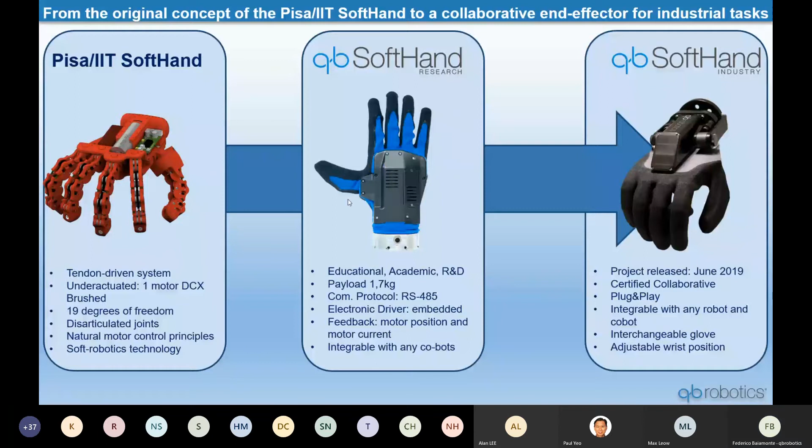So I will give a short overview of our company and especially our product. We are specialized in the realization of anthropomorphic robotic hands, and we are now at the third generation. The first prototype was realized in 2011 and was declined for different usage - research, academic, biomedical as prosthesis - and now the third generation is for industrial applications to be used as end effector for cobots. As reference and use case, we have more than 200 hands now applied and integrated in 20 countries.

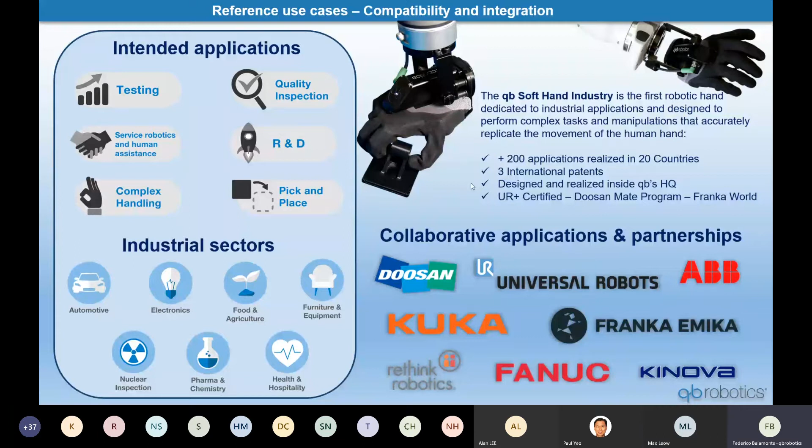The hand is covered by 3 international patents and is totally designed and realized inside our headquarters in Italy. It's mainly used to replicate human hand movement, for example for testing applications, quality inspection, or where you need to directly be in contact with a human operator. As the hand is intrinsically safe and has an anthropomorphic shape, it is compliant and designed according to international certification standards for collaborative robotics - especially ISO TS 15066. This means the hand is intrinsically safe also from a mechanical point of view.

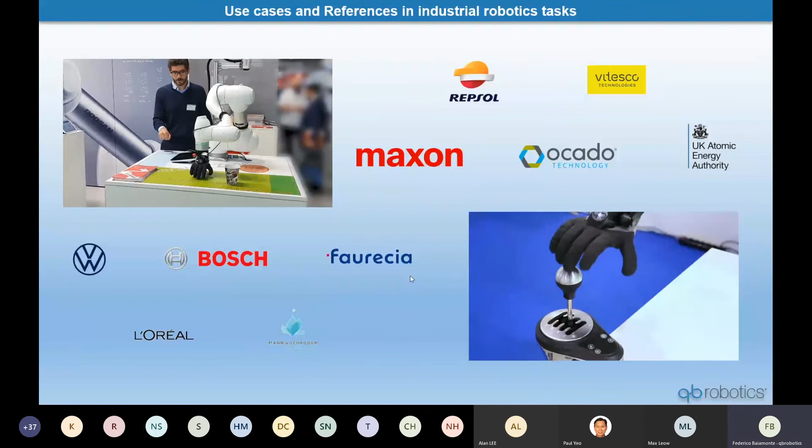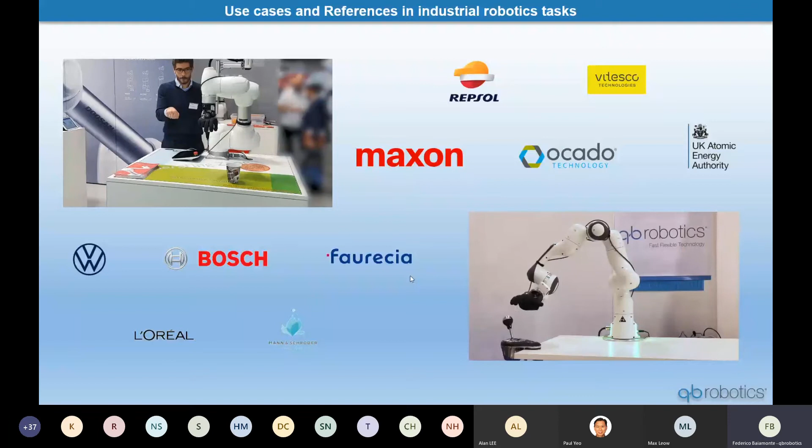I'm presenting briefly 2 kinds of applications we realized during 2 demos. As one of the main requests comes from teleoperation, the hand can be integrated to be used in teleoperation actions, especially for dangerous tasks like nuclear inspection or dangerous object manipulation. It's also mainly used for testing applications and can replicate exactly the human hand movement - the hand can be used to realize such movements.

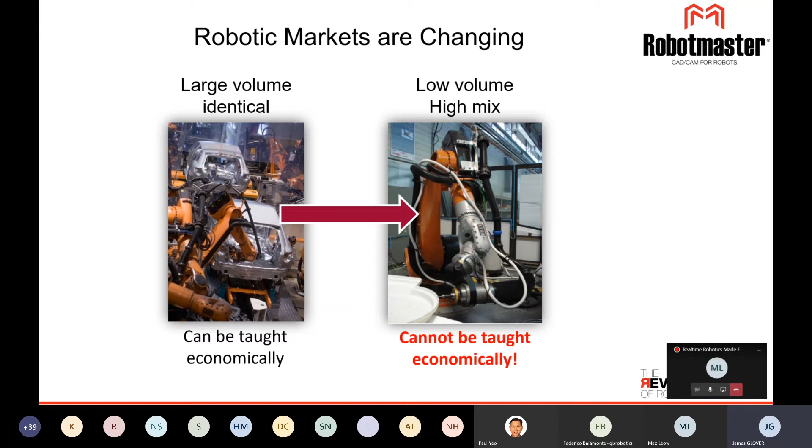So what we've done is we have applied CAD/CAM principles to robot programming. And which can take a long, long time to design and program manually by teaching, we can do in minutes. And we also correct all of the kinematic problems, which is a huge problem.

In pick and place, it's pretty much simple. You can use the control to do it. So the programming costs have to be radically reduced, and Industry 4 is clamoring for, hey, I want to take the part that I have, and I want that program to be the same as it is on a CNC machine, but with the robot.

And if one robot goes down, I want to be able to take that part and put it to another robot, maybe a different make and model, without having to reprogram it. So basically our goal is to make profits on a single item job. That allows us to get into the small, medium companies who want robots but are afraid of the programming cost.

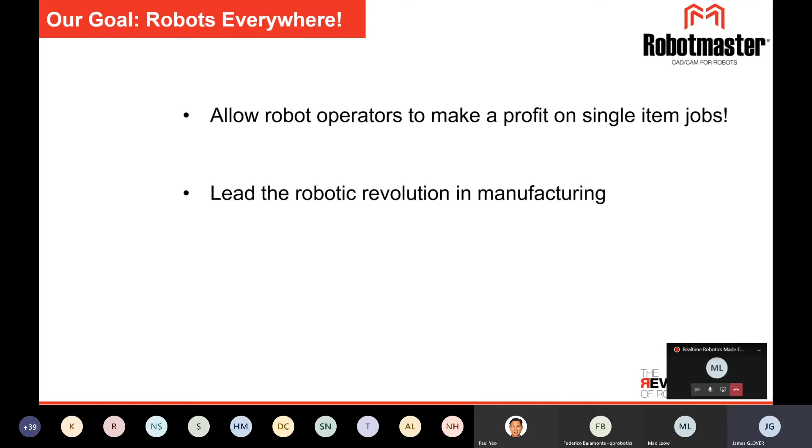We want to lead the robotic revolution in manufacturing, which we pretty much are already, but we want more. And we really want to democratize robots. So a robot in every shop.

In the beginning, CNC machines were very expensive, and you had to have special programmers. You had to shut down the machine and production to reprogram it. Basically, the robots are in the same way. That all changed very radically in the 80s with the advent of PC-based CAD/CAM systems.

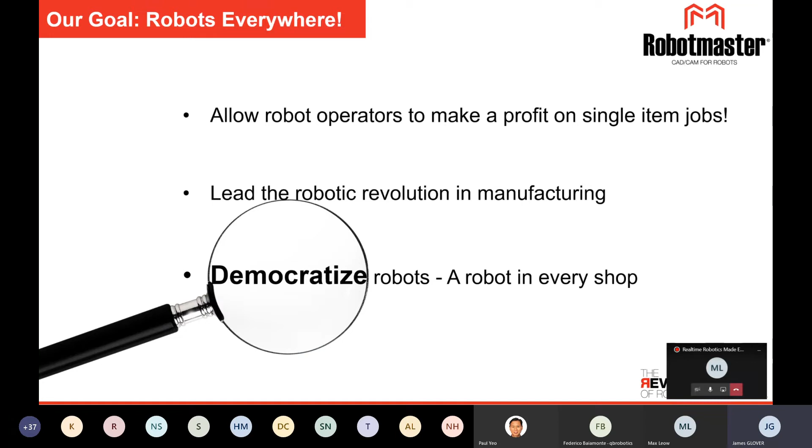We're going to do the same thing for robots. And our goal is to eliminate teaching, because you can't teach complex parts. So we want to make the robot just as easy as a 3 and 5 axis CAD/CAM.

And so you have to be quick to develop the program, fast the kinematic analysis of the robot, do advanced optimization and collision detection, which very few people are. Basically, we're the only ones who do the really high level. A couple people have copied us, thankfully.

And we have to have a quick way of correcting errors so that someone out in the shop floor can do it. And we have to function with all industrial robots. And we're now opening our system to third-party development. So that's our goal in the long term. Most of it's done. We function with everything now.

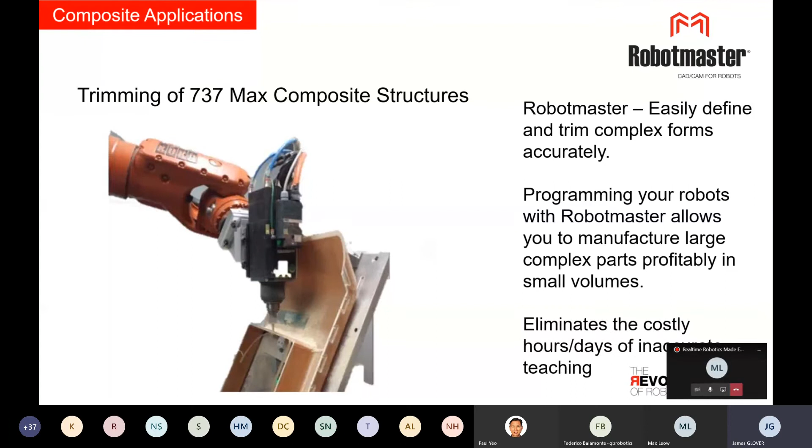And we go all the way from doing a lot of 737 composites, the A350, but that business is kind of shutting down right now. And this got us going. We do a lot of agricultural work also. This would be impossible to do otherwise without a robot.

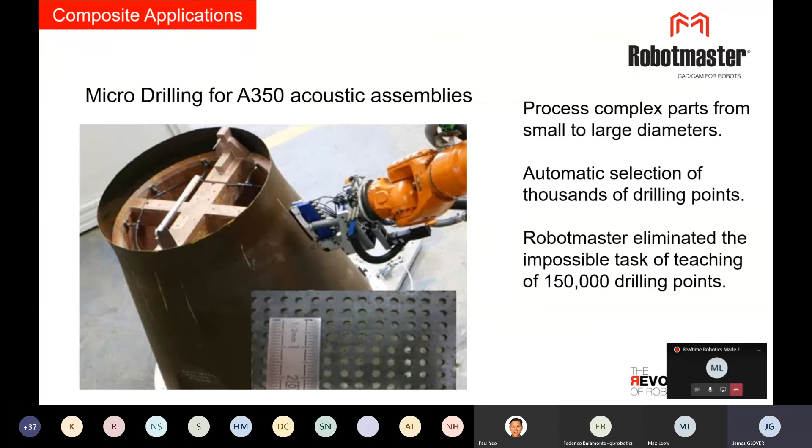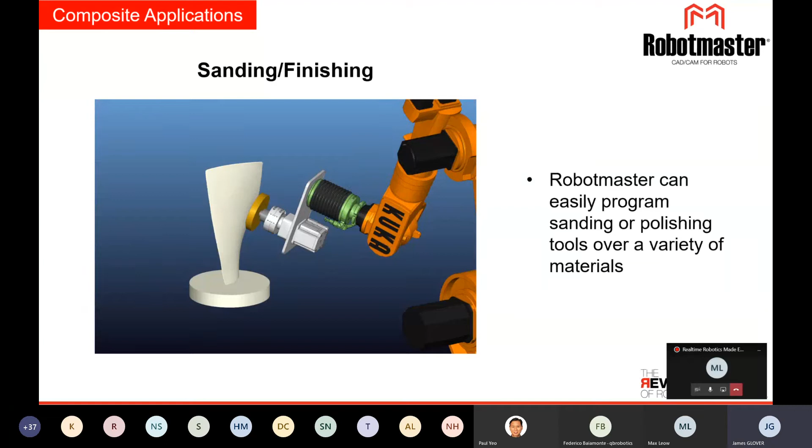We do a lot of work for the LEAP 1C engines, for the drilling cooling points. Do a lot of water jet cutting for complex parts. Sanding and finishing, which is a big demand market right now, and spraying.

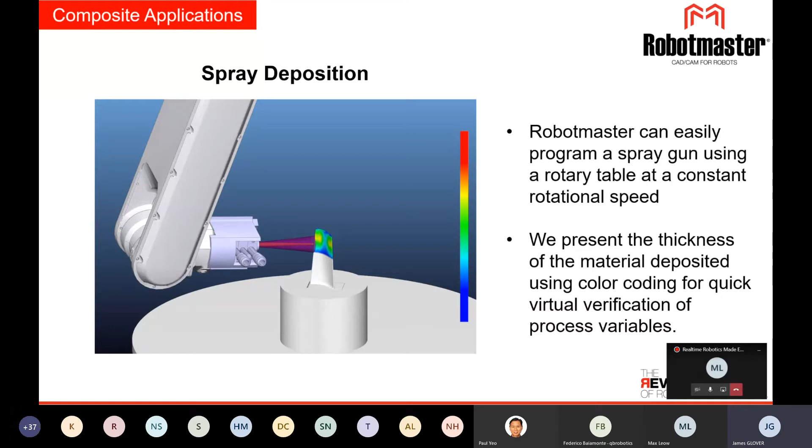So we've developed all of these special programs within Robotmaster to make programming easy and give the people an idea that, hey, I can make money with a single robot and a single job.

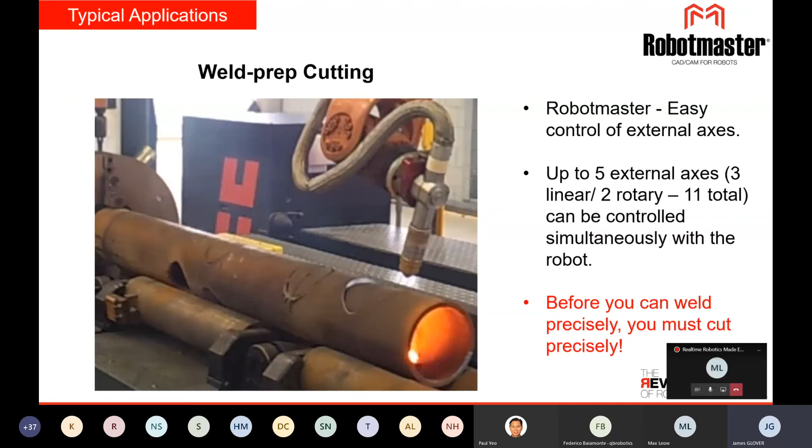And we also do a lot of weld cutting for pre-cut welding for welding, and also a lot of complex and simple welding. In fact, Keppel here in Singapore uses Robotmaster on an ABB gantry system to program all of their ship segments, and they are assembled later on. And we also do the support of the gantry.

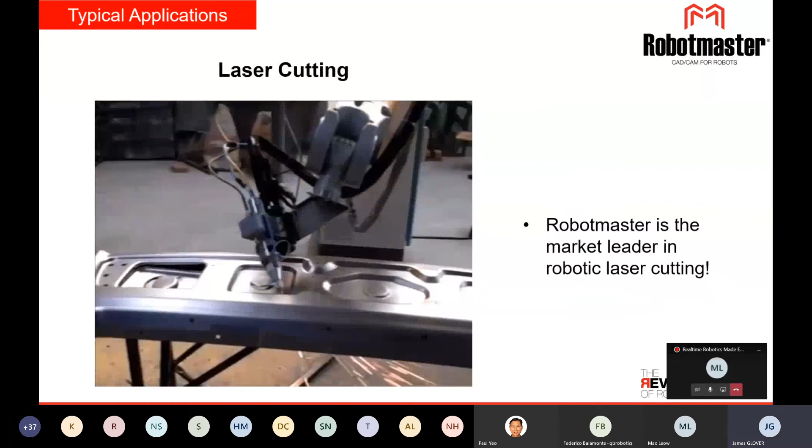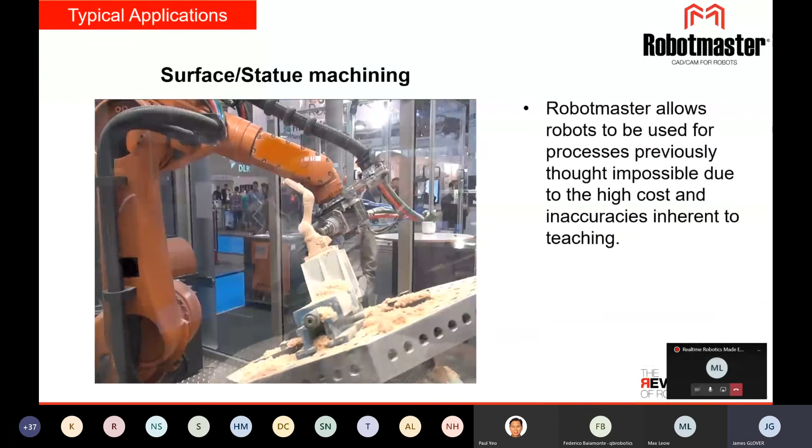Laser cutting. There's multiple things that we can do. And you can go from one robot to another. If you want this little PDF, it's available. We'll post it for you. And basically, we're allowing people to use robots for basically whatever you want, more than just pick and place.

And you can make a single item profitable, which has until now been impossible. You had to make thousands to just pay for the programming, let alone the robot.

So basically, that's what we do. Next week, we'll give you a lot more details on it and show you the process. We'll start an object by cutting it on a laser, then show it with a universal robot depositing the glue, just by changing the robots. So that is basically what we do at Robotmaster - we make you able to make money with robots.

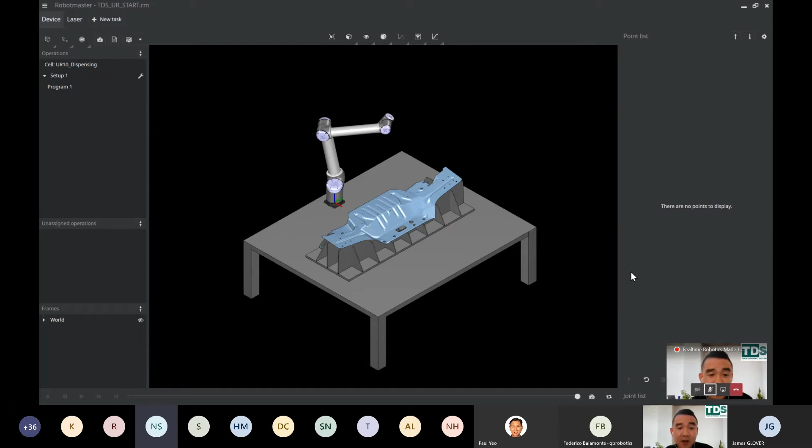I am ready, yes, if you guys are, I'm ready. Yes, you may share your screen now. Okay, can you see it?

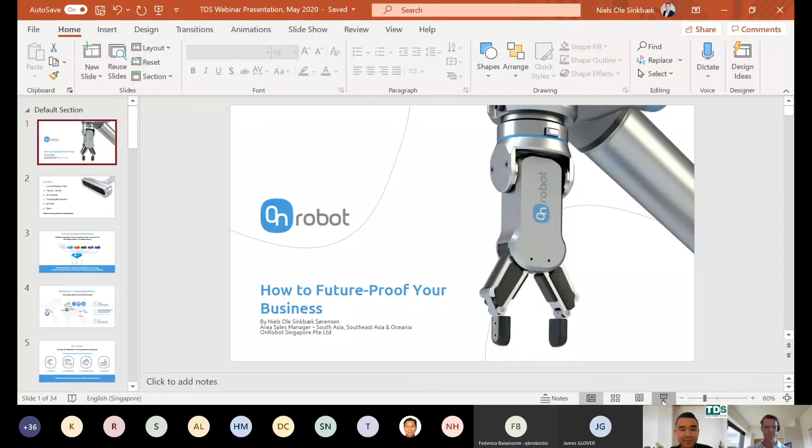Yes, okay. So thank you, Max, and thank you, TDS. My name is Niels, just to make it short, because my name is very long and difficult to pronounce. I'm from Denmark, working for OnRobot, a Danish manufacturer of collaborative end effectors. I'm the area sales manager for South Asia, Southeast Asia, and Oceania.

Give me a second here. Right, so the content - 20 minutes is not a lot of time, so I might have to skip a few slides here and there, but ultimately, if you want my presentation afterwards, I'll share it with you.

I'll talk a little about who OnRobot is and the vision for the company, the new normal, and obviously we're talking about COVID-19 and what that means for automation and businesses. So today I'll cover how do you future-proof your business, a little about our products, something about what we call a one system solution, a quick summary, and then the Q&A at the end of the session - I'll wait on that until Max goes on at the end.

So who is OnRobot? We are a Danish company, but basically a merger of 3 companies from Denmark, Hungary, and the US respectively. We are located in a city called Odense in Denmark, the same city as Universal Robots, by the way. We are around 180 employees globally now - I was staff number 13, and that was 2.5 years ago, so we are growing very fast.

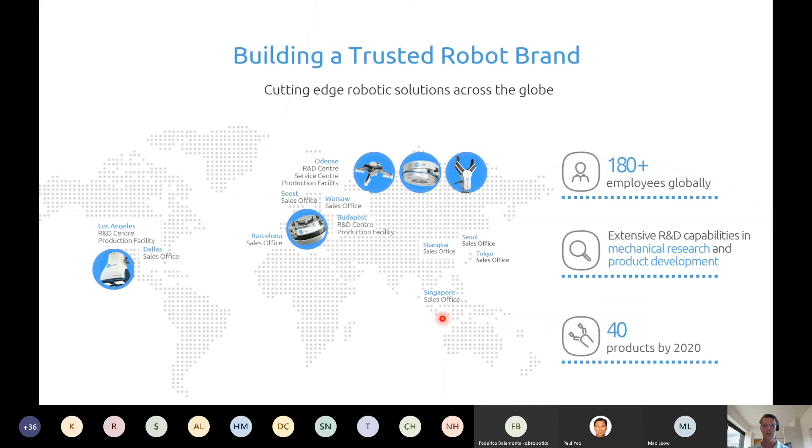In terms of APAC, I'm sitting here in Singapore, which is our APAC HQ, but we also have offices in Shanghai, Seoul, and Tokyo. So if you guys have factories around the region, just let me know and I can put you in contact with our local representatives.

Our vision is basically to build a one-stop shop for collaborative applications. That means we want to integrate with every single robot brand in the market - we are at some level already there. We want to work with all applications, whether you have pick and place, assembly, inspection, palletizing, whatever you want to do, we want to have a tool for it.

We want to be able to supply all accessory types - grippers, sensing technologies, quick changers, processing tools, etc. I'll talk more about our products later on. We want to supply tools or end effectors for all industries, and the reason we can do that is that everything we do is electric - we do not want to touch pneumatics, we don't want to go into it. So we only do products that are electric. We have products now running in greenhouses, universities, banks, cafes, hospitals, etc., and that's possible because we do things electrically and don't use pneumatics.

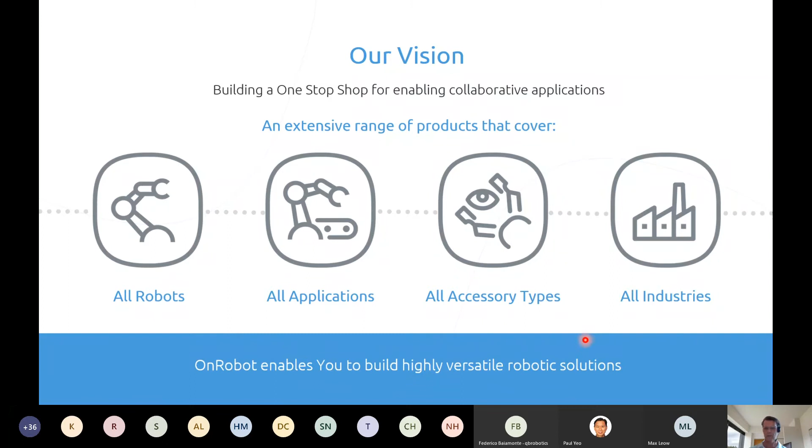Okay, so the new normal - obviously, as I said earlier, we are talking about the effects of COVID-19 for automation. Daryl, I was talking a little about it earlier, so I just want to give my point of view. The world is changing, that is for sure. If you haven't read an article somewhere in a newspaper, a magazine, online, in the past 2 months, you must have been hiding under a rock somewhere, because it's everywhere and everybody's talking about it.

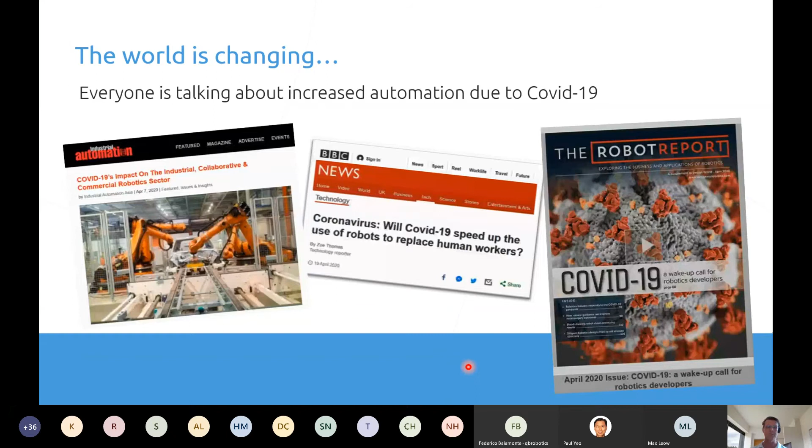Automation will be a bigger part of the future in any industry, any sector you're in. So what does it mean in terms of how to future-proof your business?

Manufacturers, traditional manufacturers, will have to relook at the processes where they are now using human labor, because a lot of factories have not been able to open since they can't send workers to the factory, or laborers have refused to go because they're afraid of getting ill. These are things that can really seriously affect your business, and maybe even close your business down if you're not prepared for this kind of thing.

So what you have to look at now is all these applications where you are using humans, like pick and place applications, packaging, palletizing, warehousing, etc. You have to look at how to automate that now and improve your processes and overcome a potential new COVID-19, because it's not if it happens, it will happen again. It'll be something different, but similar to COVID-19, it will happen again. So you need to prepare your business for that.

Of course, we see it in health services. I'm sure you've also seen a lot of videos, especially testing of COVID-19 patients, using collaborative robots or collaborative applications. But I'm sure in the future you will also see it in hospitals serving medicine or serving meals. Already now, you have surgical procedures using robots, and this will become more and more common in any health service industry you go into in the future.

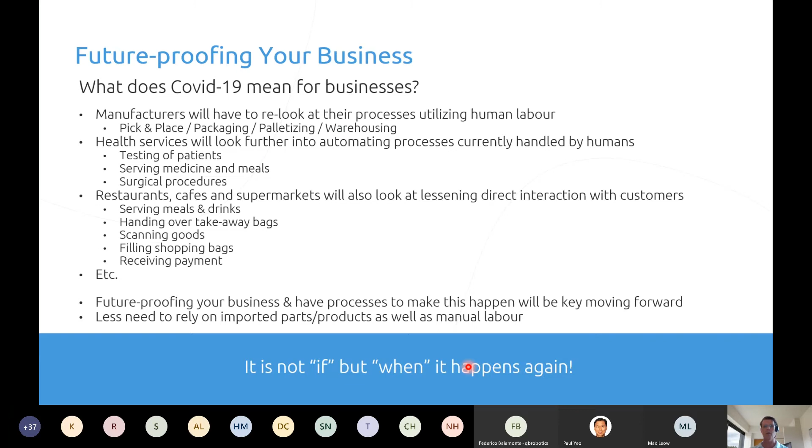And this is here what we are here to help you with - basically to enable easy implementation of automation in your specific area, your specific industry.

So prior to COVID-19, what were the typical motivations for people to start buying robots and automation? Number one, lack of people, rising labor cost, for sure. That's the same in Singapore - labor cost is very expensive. Of course, you have the benefit of bringing people in from Johor, or from Sri Lanka and Bangladesh and so on, but that cannot keep on going. Labor costs will keep going up, and it's not efficient or competitive in the long run. Second most is improving competitiveness and efficiency again, since using manual labor, humans can only do so much.

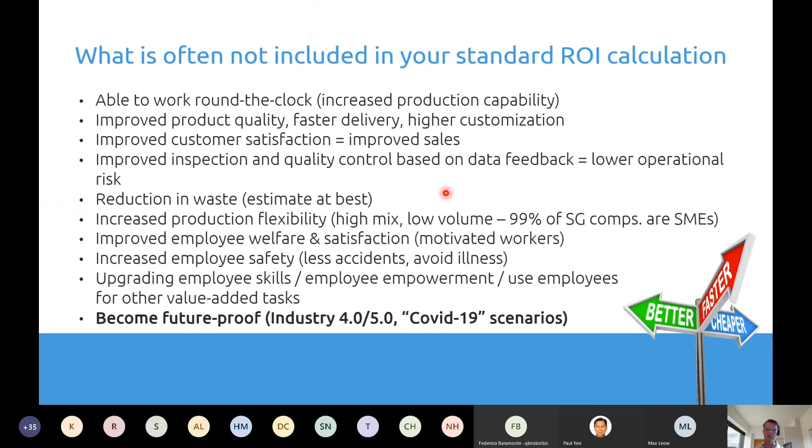Just a quick look at our products. Currently we have a big range of grippers, all collaborative. We have sensing technologies, force-torque sensors, vision systems, and quick changers. In the coming weeks we'll be launching processing tools as well. By the end of this year, we're looking at having somewhere between 30 to 40 plus different products.

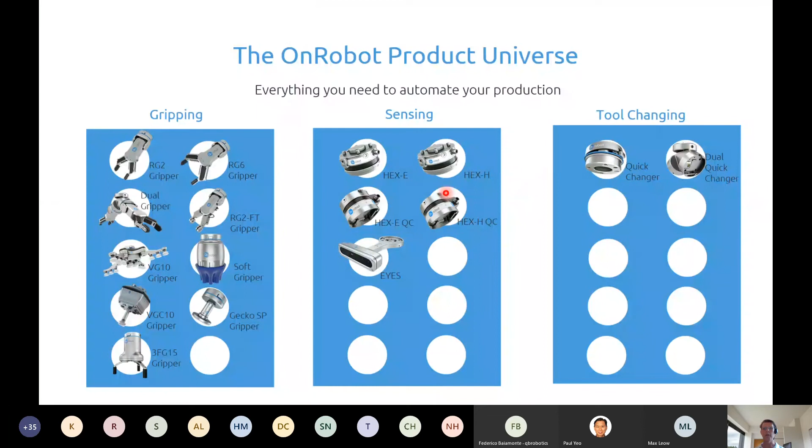What is this one system solution? I'll just play a quick video here. I hope that it plays with sound as well.

Okay, so one system, zero complexity. Basically, with our current system you can take any of our end effectors and install it on any robot and use the same software. So you become robot independent in a sense. You can choose a gripper, for instance, you choose what we call a robot kit, and you choose a kind of quick changer. These three things together with one of our compute boxes, you can connect directly to a robot controller. The UI is a little bit different because we have what we call URCaps, which is our own developed software for UR.

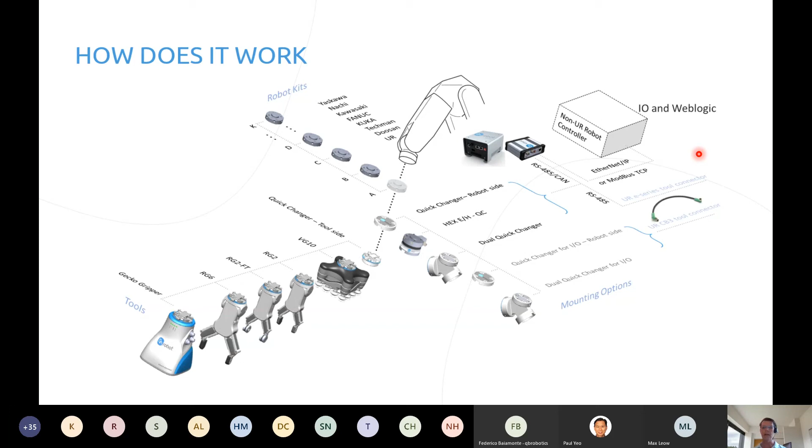But on other robots, you can use what we call WebLogic, and I'll give a brief introduction to that a little bit later. You can connect our end effectors with either digital I/O, with Ethernet IP, or Modbus TCP. You can also use dual configuration, so you can use two of the same grippers, or mix and match different grippers if you want. You can have, for instance, a servo gripper and a vacuum gripper combined in one solution.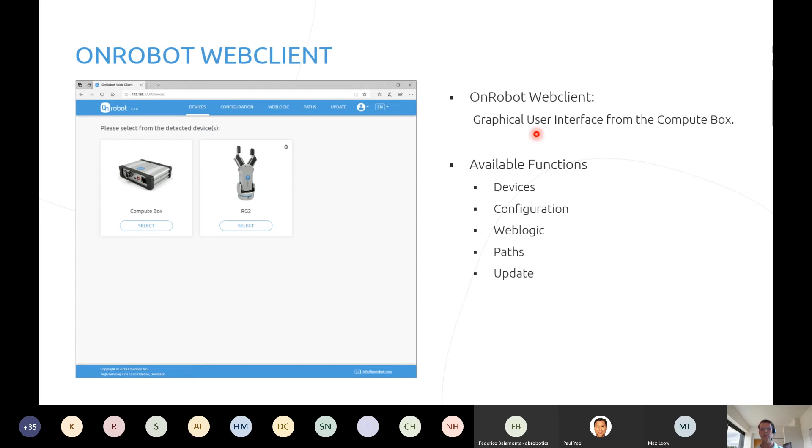So it's really, really simple and very fast to install. What we have is, via our compute box, which is this device here, a web client which you can connect to your laptop or your PC. You can go in and check the setup, and if you connect one of our grippers, for instance, you can check what device is there and what's the configuration. You can go in and program it with this graphical user interface. You can do path recording, and you can do updates.

Let me skip these. This is our WebLogic. Part of WebLogic is, as I said, if you connect with digital I/O, you can go in and program any of our end effectors, and you can use this for any robot brand in the market. It doesn't matter what robot it is. If you have, for instance, 3 or 4 different robot brands in your factory, you can change our end effectors between the different robots and use the same software and the same mechanical integration. So it's really, really simple and very, very fast.

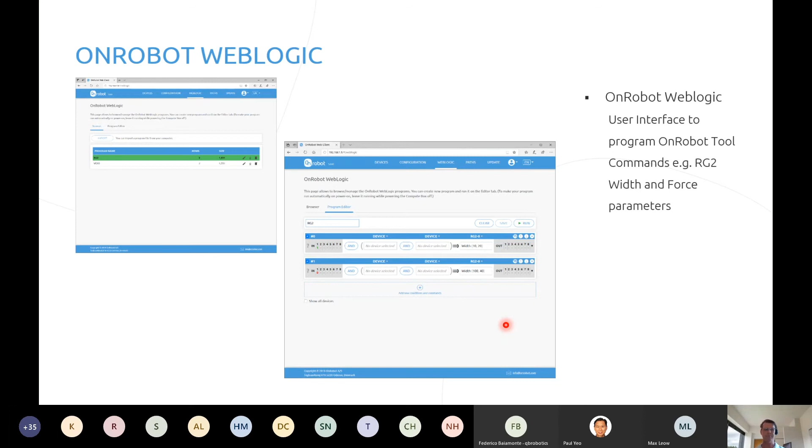So this is what we call our one OnRobot system. You choose what robot you want to use, what tool you want to use, what quick changer, single or dual. You combine this, and you have different versions and opportunities for using machine tending, surface finishing, assembly, pick and place, etc. Basically, we give you one solution from one provider, and we help you increase your bottom line.

By helping to save cost in terms of integration and deployment, and also increase your productivity. So it's very easy to deploy, but also very easy to redeploy, as I mentioned earlier.

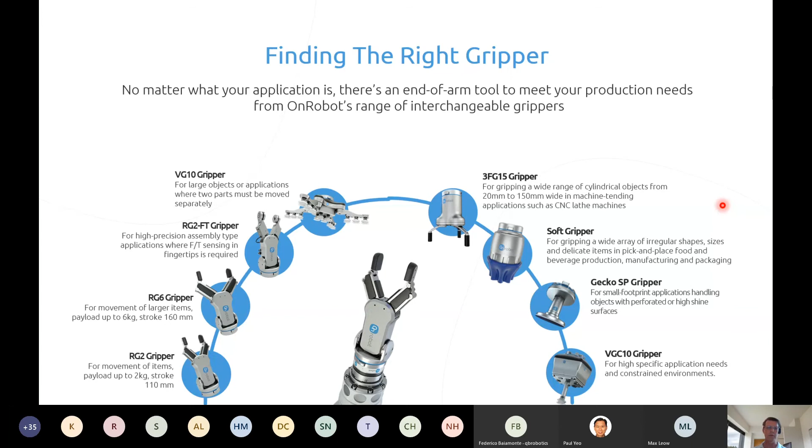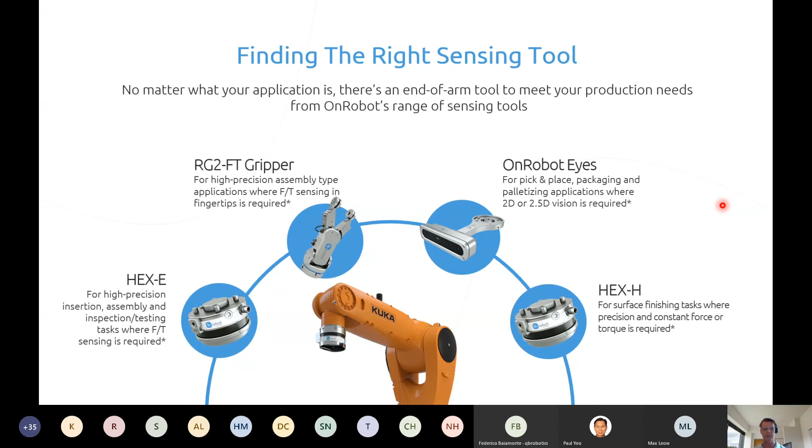I'm not going to spend much time on this—you'll get this presentation afterwards. But basically, this is a quick showcase of what gripper to use for what application and what size and type of product. So finding the right gripper, finding the right sensing tool, whether it's force torque sensors, vision systems, or grippers with force torque sensors. This is just a quick overview of finding the right end effector.

Let me see, half a minute left—I'll go a bit fast here. Using the right robot accessory will really help you revolutionize your automation. It's very flexible and easy to deploy all our tools on different robots, it doesn't matter what it is. You can increase your production because you can basically run 24 hours a day, and it's much more reliable than human workers.

You can also help lower your automation costs because you don't need safety fencing. The programming is very easy, and the installation cost is typically very, very low. So we make automation very accessible with this one system solution we have.

We help you future-proof your employment and production because we make it very easy, very simple. We can basically teach any production worker how to program our end effectors. It is that easy, especially if you put it on a UR cobot. It is super easy with our combined software.

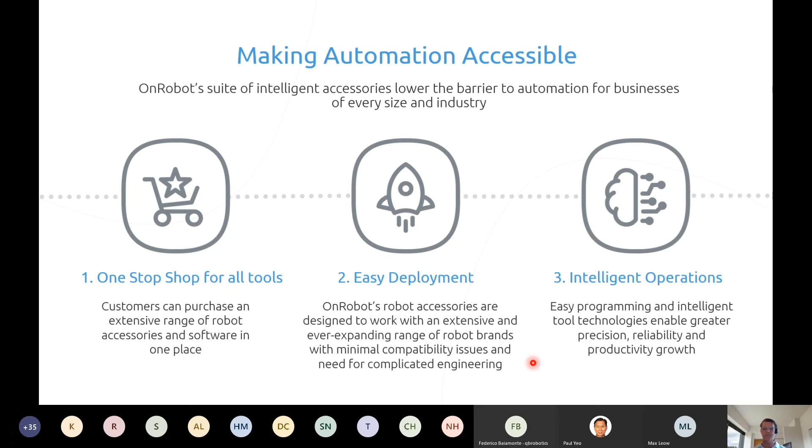So in summary, what we do is offer you a one system solution which enables either system integrators, manufacturers, or service industry companies to achieve automation solutions very quickly, efficiently, at a low cost, and with very high flexibility. You can use the same end effector for different applications from day to day, depending on what you need to do. In that sense, we help you future-proof your business today and lessen the risk for tomorrow or for a coming COVID-19 scenario.

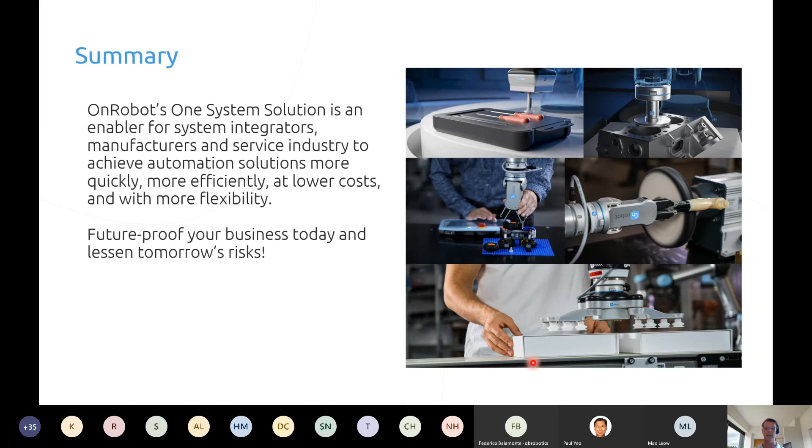So that's it for me. Just about 20 minutes, I hope that was okay. Yes, just nice.

Once again, thank you, Niels, for your thorough introduction. That was a really interesting update on the smart robotic grippers that OnRobot can provide.

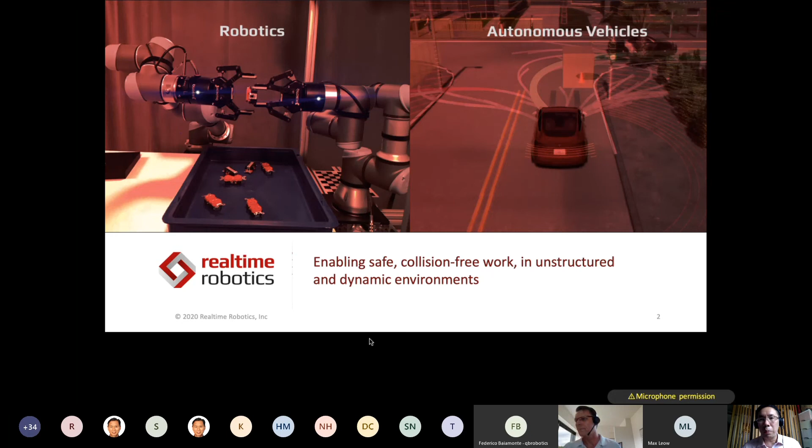The company Realtime Robotics is interested in 2 focuses: one is the robotic sector, the other is autonomous vehicles. That will be, let's say, in the pipeline on the right-hand side, the autonomous vehicles. So today I'll spend more time on the robotic side.

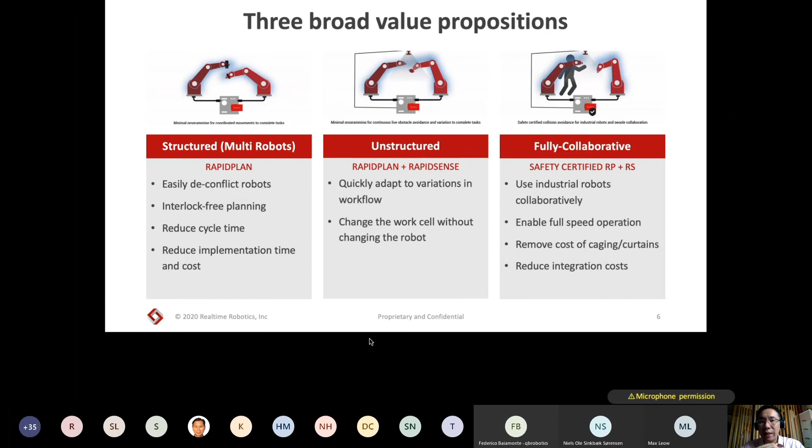Here, we introduce a friendly supplement to what people are doing in the industrial and collaborative sector by adding a supplemental solution that we are offering.

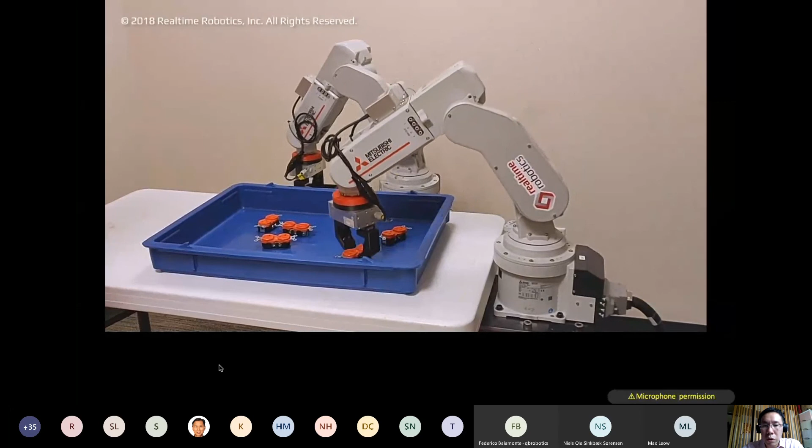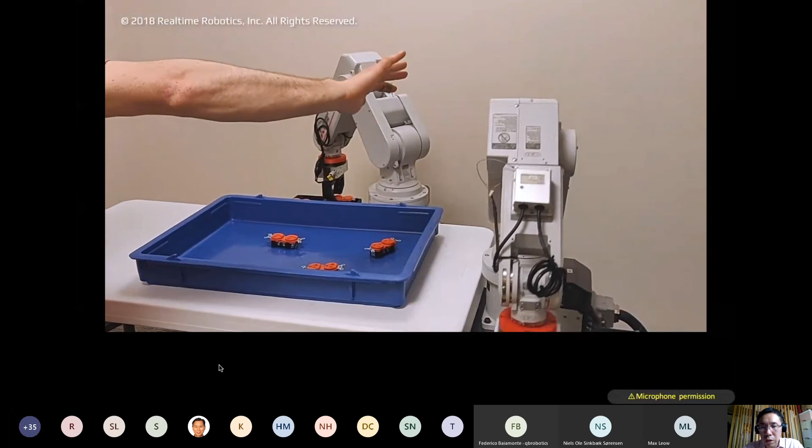So I use this example. Let me see whether this video will give you a good illustration of what we are talking about. When two robots are moving at their own predefined roadmap, there's a concern whether robot A is working collaboratively with robot B, and whether changes in the environment will affect the safety that the workspace was designed for.

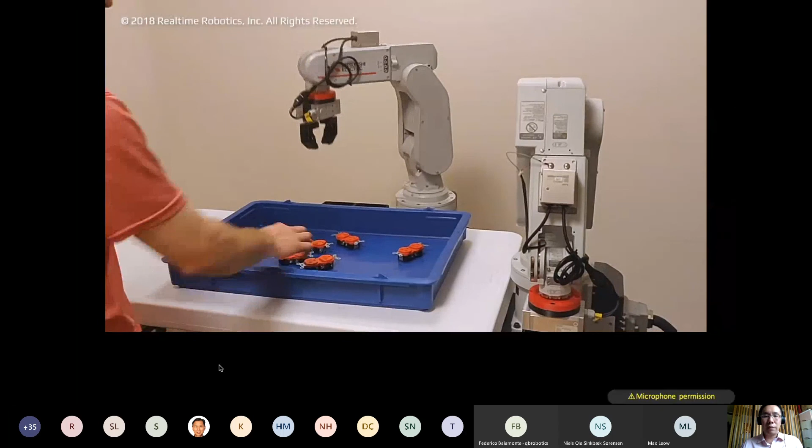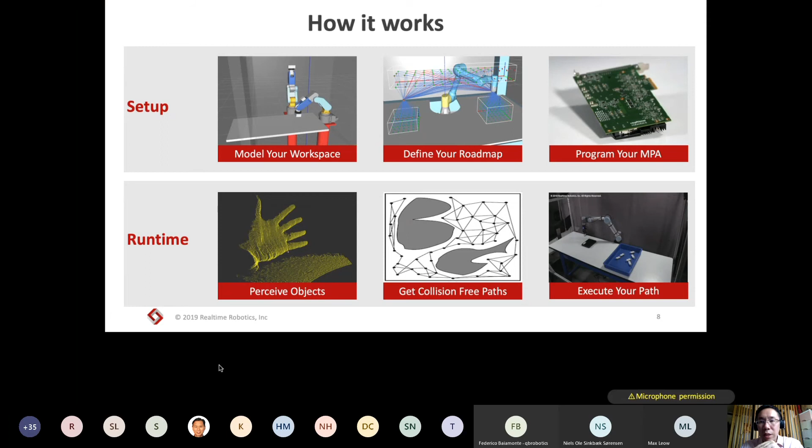So how it works: we have a controller supplementing in between the PLC and the robot. On the left-hand side, when the origin or source of the material's orientation is frequently changing, and the smaller black tray destination is constantly irregular or moving...

Our solution will supplement both the industrial robot and the collaborative robot carefully and promptly in place. On the right-hand side, it's not about the design of the process or the path, it's more about the changes in the work cell orientation.

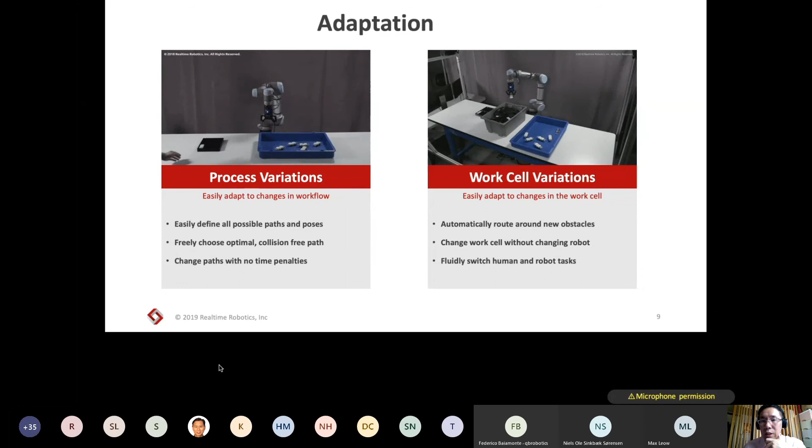When a robot is programmed, like our friend the blue robot programmed from the blue tray to the black tray, if there's a sudden addition of an obstacle in between, either you need to reprogram or there's idle time. But with our solution, we are supplementing a timeless gap to change the environment.

So here we have the robot, and then we have different sensors to make the RapidPlan and the RapidSense work together functionally.

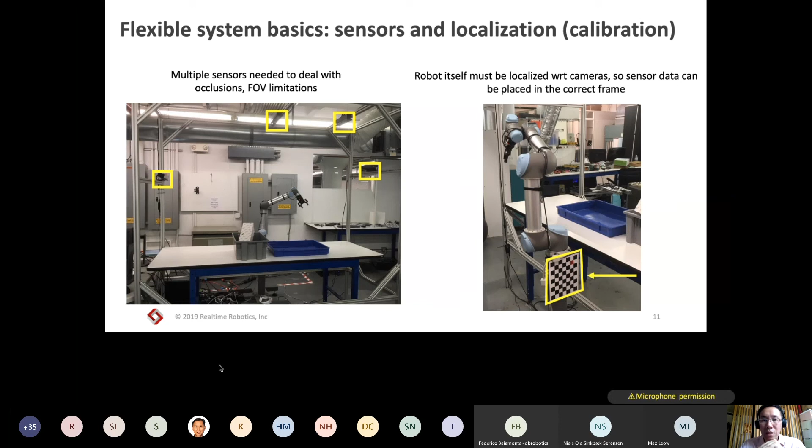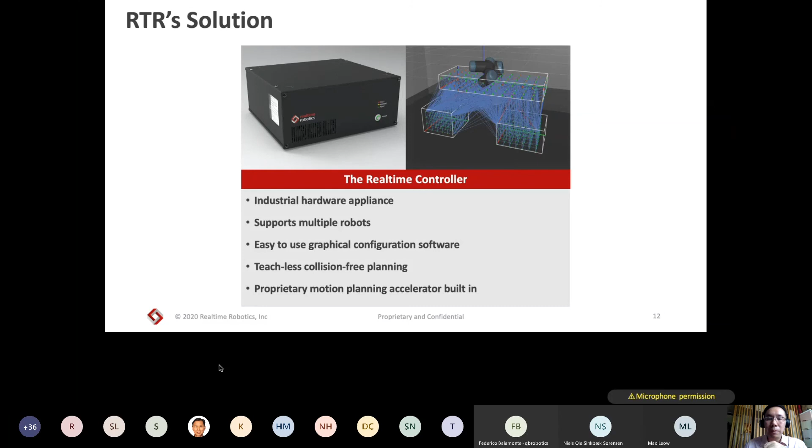Let's discuss the core technology of the controller. When the robot moves from pickup A to destination B, usually there's a predefined path. Here we use a swept motion, so on the right-hand side, instead of calculating one single path, we are designing a swept motion of all possible options within the work cell limitation. Once a predefined path from A to B experiences some obstacle or abnormality, the controller will automatically create a plan B for that path. It is what we call motion planning.

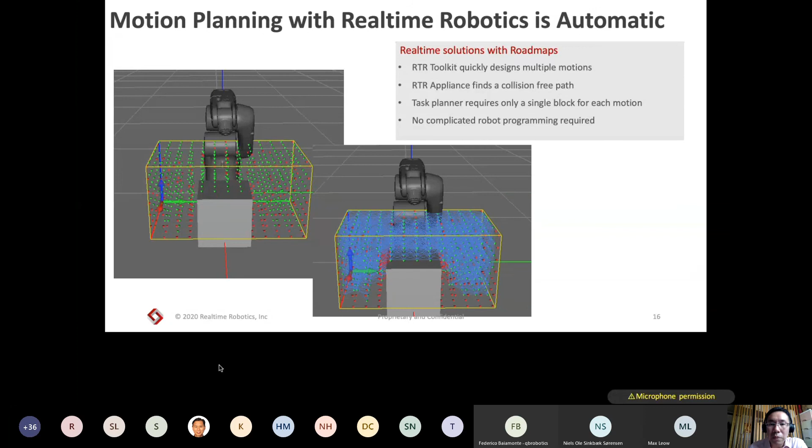You can see this is predefined, the red arrows are predefined, but what we're offering is the whole mesh of this area on the left-hand side. The yellow box is our area, and we are giving out all the possible arrangements within that yellow box, and this is the outcome.

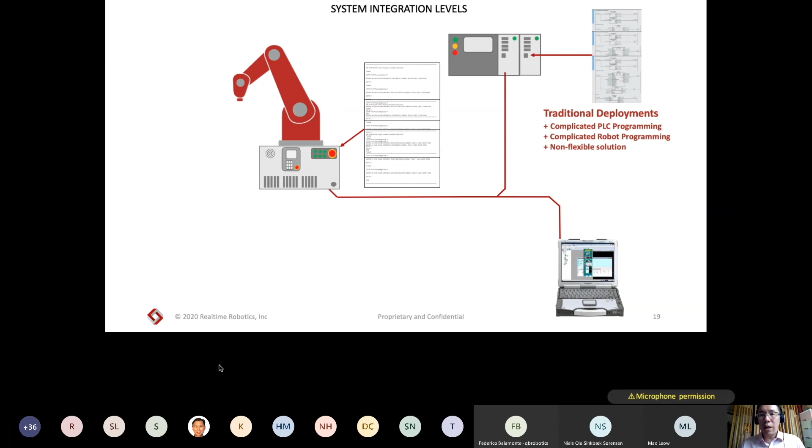Let me illustrate, by the way, this shows we work perfectly well with both the PLC and the robot, and we can work effectively. At the moment, one controller can manage four robots at the same time, simultaneously.

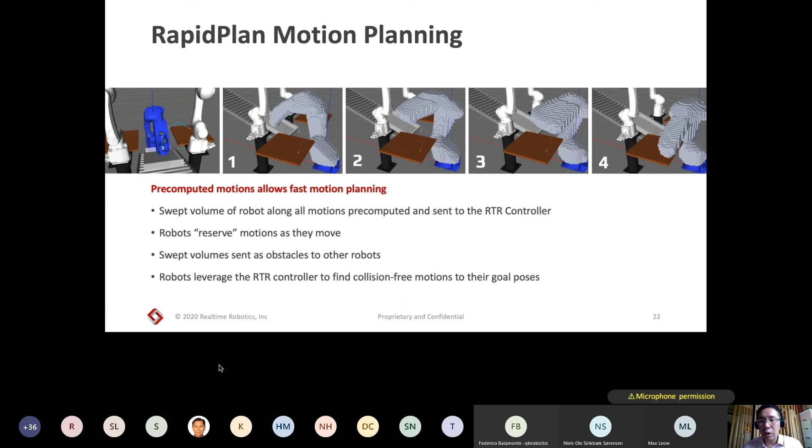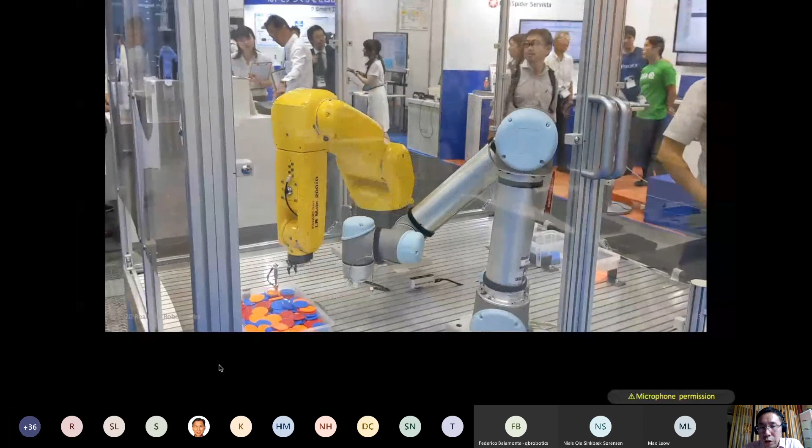This is what we are talking about, the swept volume. Instead of one linear motion, we are calculating from the left to the right in this gray space fashion. Here, the yellow robot has the defined priority, whereas the blue robot works collaboratively with it. You can see there are certain areas where the blue robot will idle itself, giving way for the yellow robot when it is programmed.

I'm sorry, gentlemen, this video is certainly idle. It worked perfectly a few minutes ago.

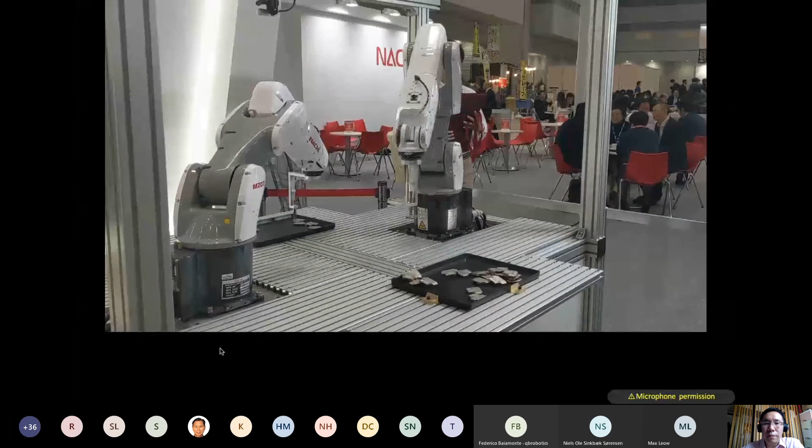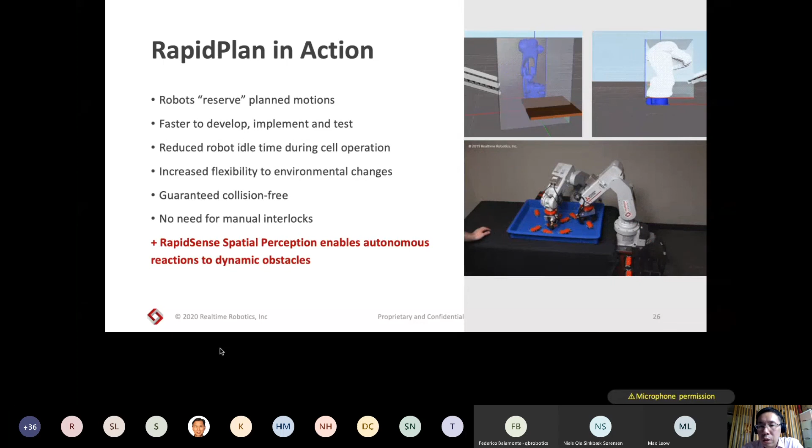So this person holding the arm is not a predefined program, it's actually an ad hoc, self-created obstacle, so you can see the two gray color robots can effectively detect any sudden changes in the environment and work on plan B, plan C, or even plan D, whatever routing it needs, so it can continue the process.

Here is another demonstration with a sudden insertion of a human arm. The robot can still maneuver, absolute collision free. Bear in mind, as I mentioned earlier, this will create a very good platform, removing the concern about both the robot speed and the payload, the limitation we are facing today.

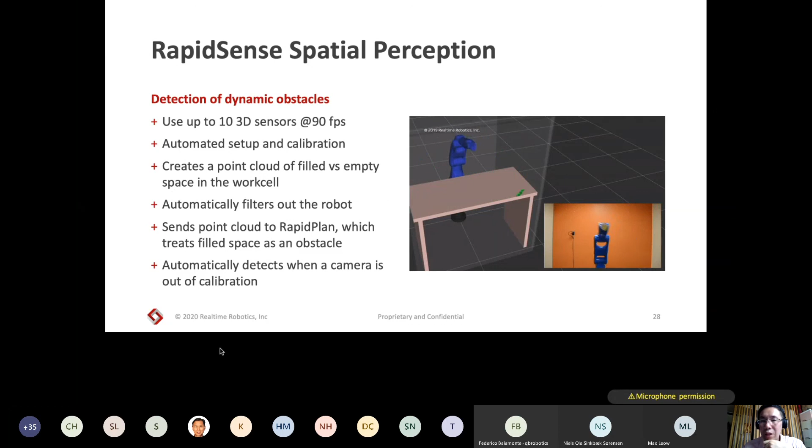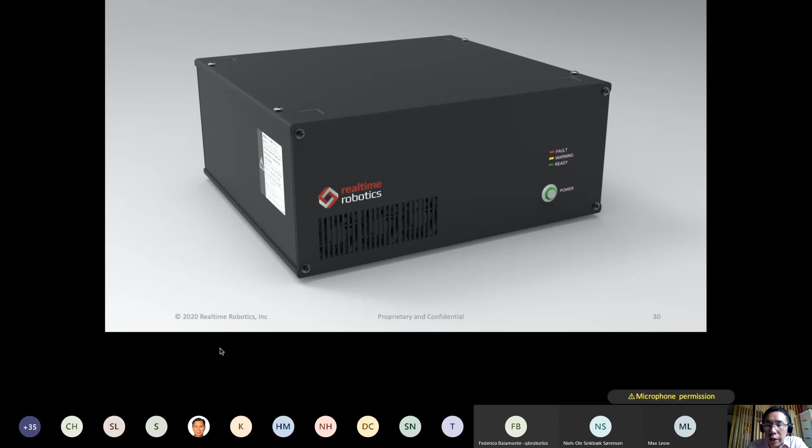So this is going back to what we are. This is the controller box that fits in between the PLC and the robot. It is very space friendly. It can be incorporated, installed, and functional in a very timely fashion. Hold on a minute, I should go back to here.

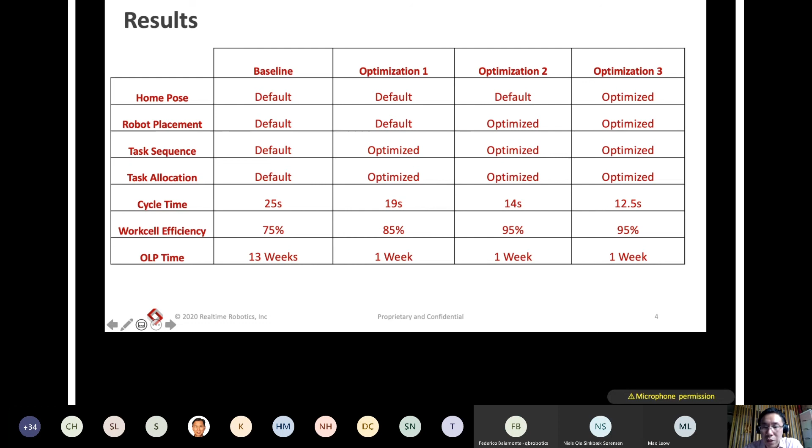So this is Realtime Robotics. TDS will be giving you some YouTube links so you can easily see our technology and our case studies through the YouTube channel. If there's anything you have questions about, please do not hesitate to send me emails or contact TDS, they can get hold of me easily. Thank you very much, gentlemen, ladies.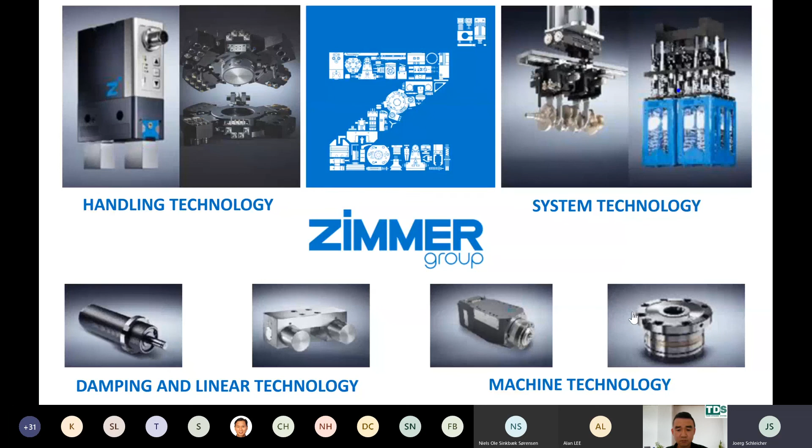Next time when I talk longer, I will talk a little bit more about tool changers, maybe also important in these times now. We have tool changers up to 1 ton, and I will talk about where to use tool changers, why to use tool changers, what to consider if you use tool changers, which signals you can transfer on tool changers, and what we have specially for Universal Robot here, as well as special applications with tool changers for spindles, for example.